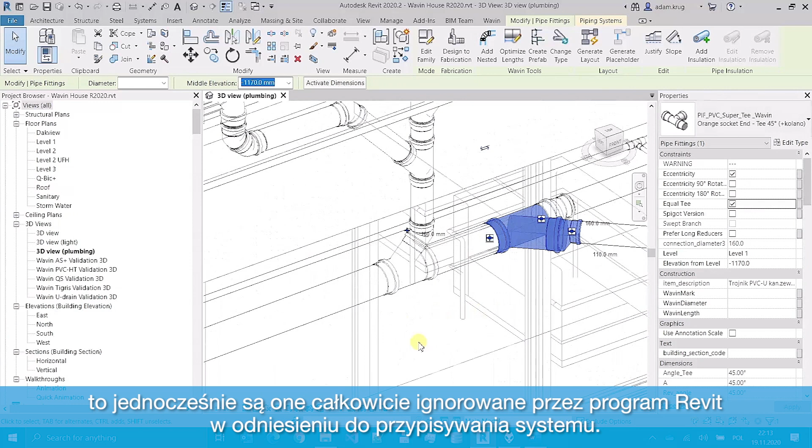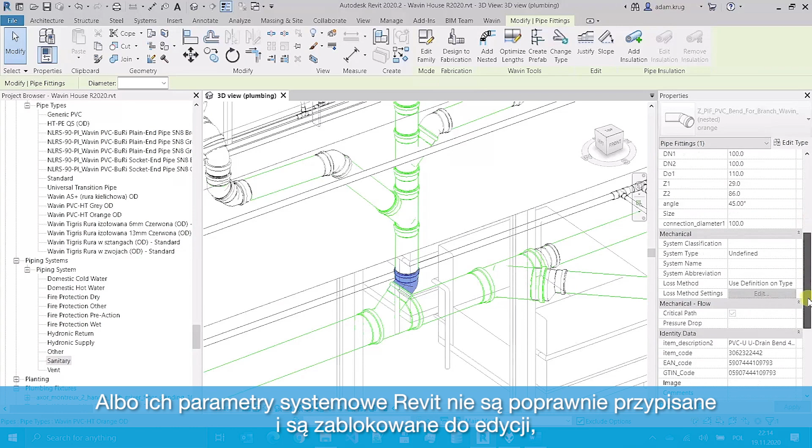For instance, whenever you assign some kind of graphical override on a system, these nested families will remain without the override. Or their Revit system parameters are not properly assigned and are blocked for editing, so you cannot really use them for scheduling elements per system.

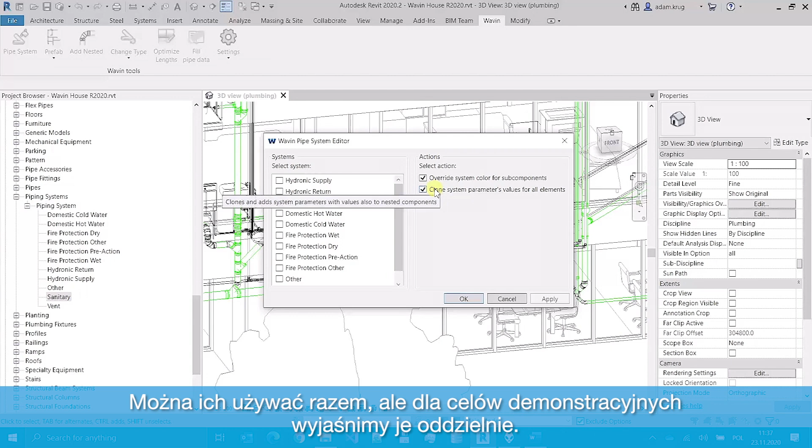To facilitate these exact issues, Wavin introduced the Pipe System feature in the WavinTools Revit plugin. The button can be found on the Wavin ribbon. After clicking it, it displays a window where you can find a list of all systems in the currently active project on the left and 2 checkboxes on the right to further define our intended action. They can be used together, but for the sake of demonstration, I'll explain them separately.

Now, let's take the sanitary system. We can see that its graphical override is set to be these green lines. And on this spot here, we can see that the nested components remain black. Let's amend that using the Pipe System feature.

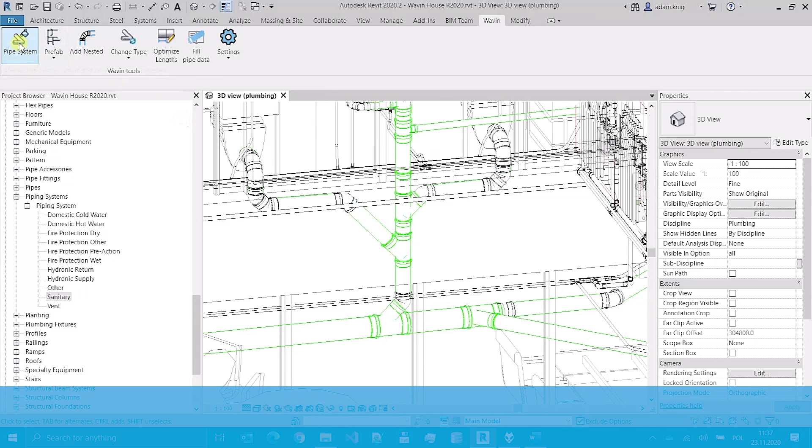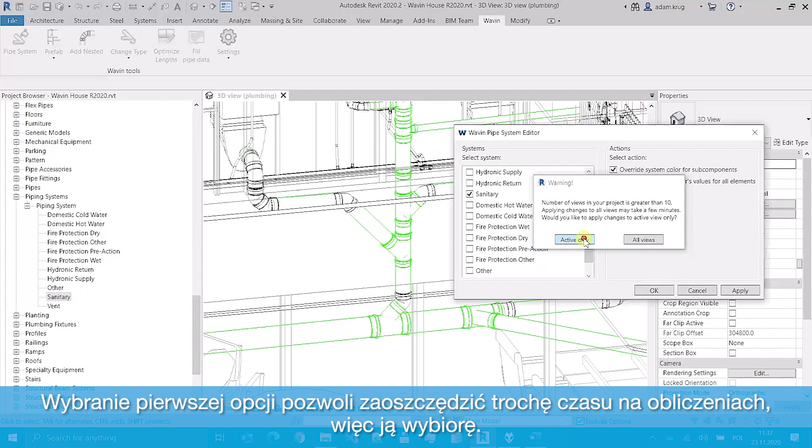To do so, I open the dialog window, select the sanitary system, select only the Override System Color for Subcomponents checkbox, and click Apply. Now I need to decide if the overrides should be amended in only the active view or all of the views. Choosing the first option can save some computation time, so I'll pick it. We can see that the graphical override is amended, and not only on this spot, but across the entire project.

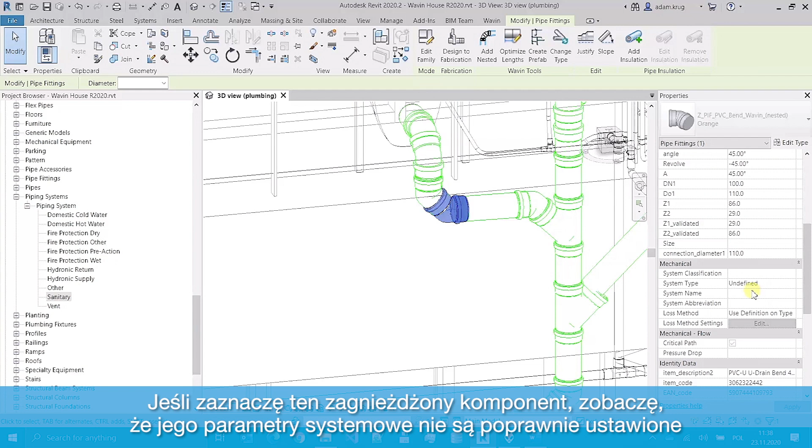All right, let's look closer now at the other possible action in the Pipe System feature. If I select this nested component, I can see that its system parameters are not set correctly, and I cannot change the values. They are grayed out. But the super component has these parameters set correctly. I can read that it belongs to the sanitary system.

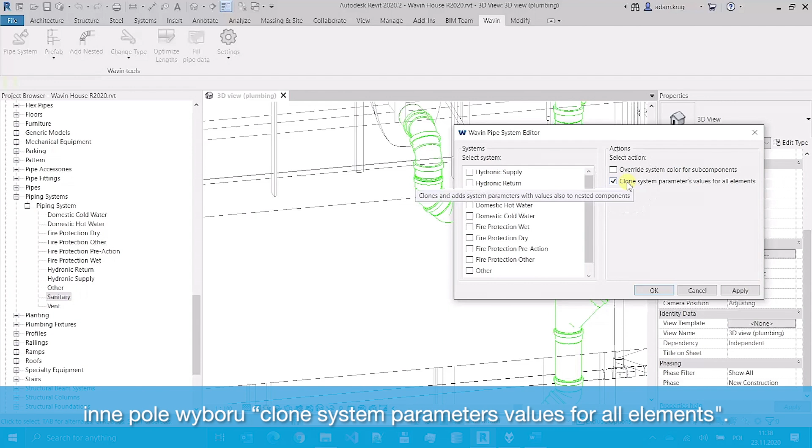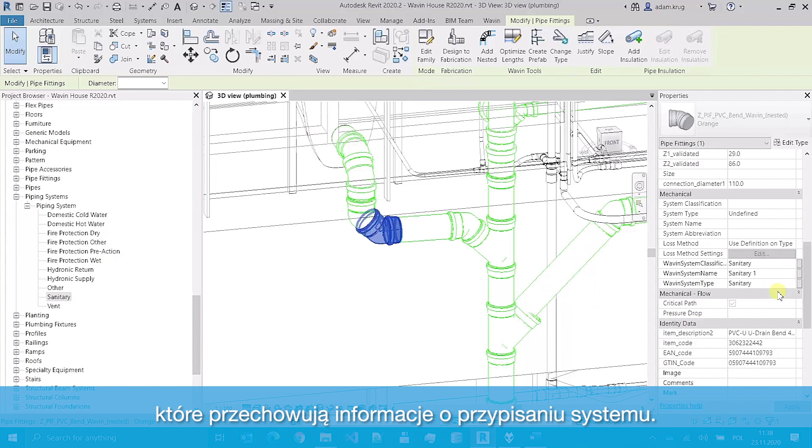Let's amend that too. Click on the Pipe System button. Again, select Sanitary, and this time select the other checkbox, Clone System Parameters Values for all elements, and click Apply. The action is over. Obviously, this time we cannot see any visual change because we only changed some information inside the elements and not how they look. If we select the nested component again, we will notice a set of 3 new parameters that store information about the system assignment.

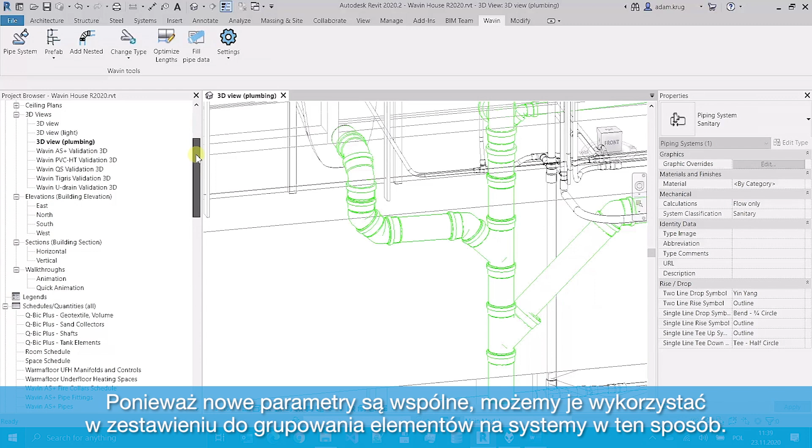Since Revit does not allow for value modification of its own parameters, this is the only possible solution to tackle the problem: to use a different set of parameters. We can see that the values are the same as at the super component. Since the new parameters are shared, we can use them in a schedule to group the elements per system like this.